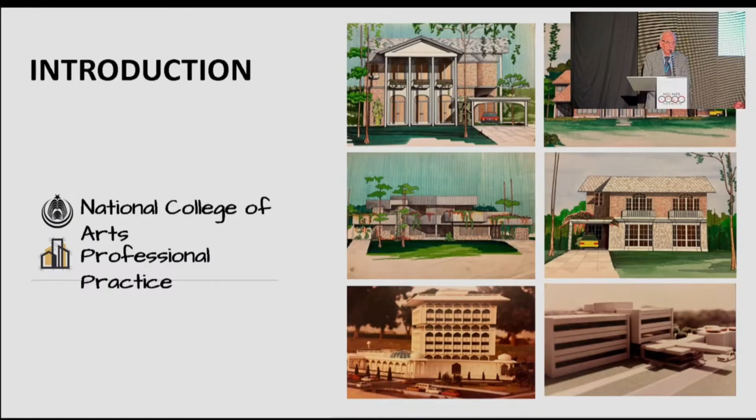One month after this occasion, Huzur became the 5th Caliph of the Jamaat. I had association with Huzur since that time, and I did many projects under his instruction. Next, please.

Then I had the opportunity to work with IAAAE, Institute of Architects and Engineers, Ahmadi Architects and Engineers in Pakistan. The Ahmadi Architects and Engineers Association was established in Khalifa Salis's time in 1971. Under the mentorship of Khalifa Salis, I also had the opportunity to work on different projects.

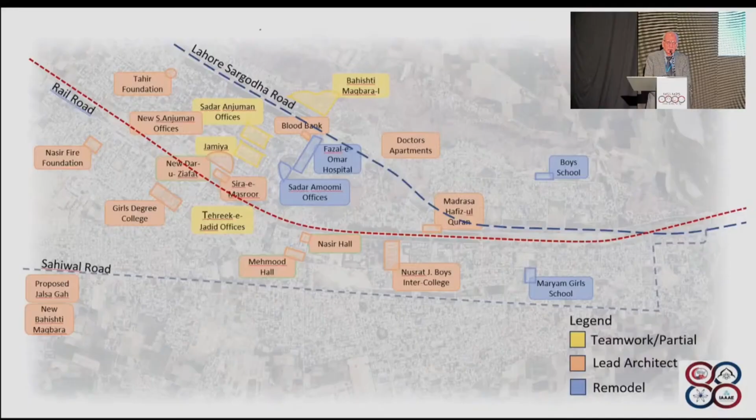Now, as you look at this slide, the projects marked in red, I was the lead architect for these projects. The buildings marked in blue were there, but I was asked to do remodeling of these projects. And the projects marked in yellow are the projects which I did in teamwork with other architects and engineers. Next.

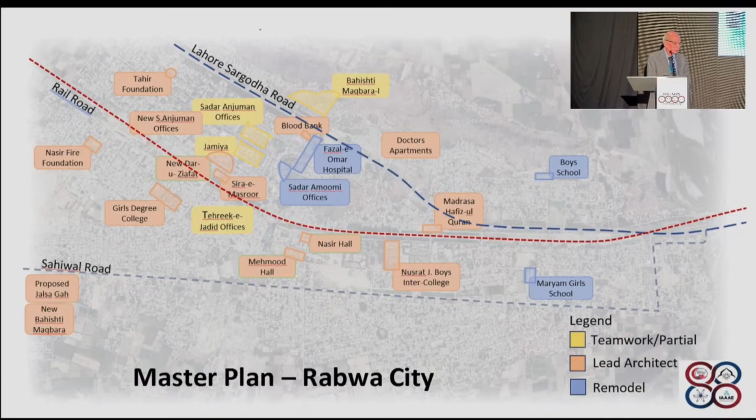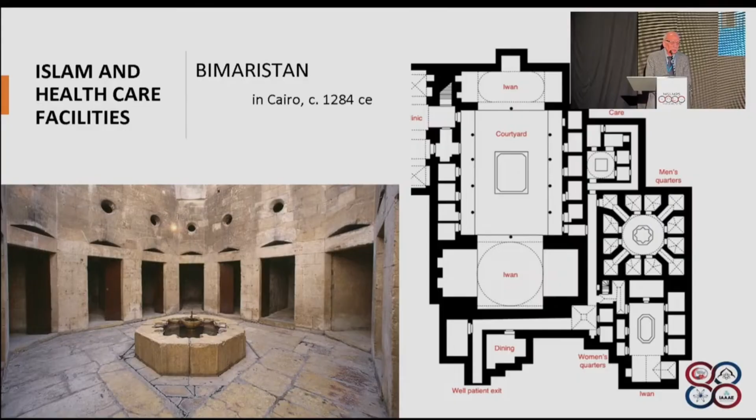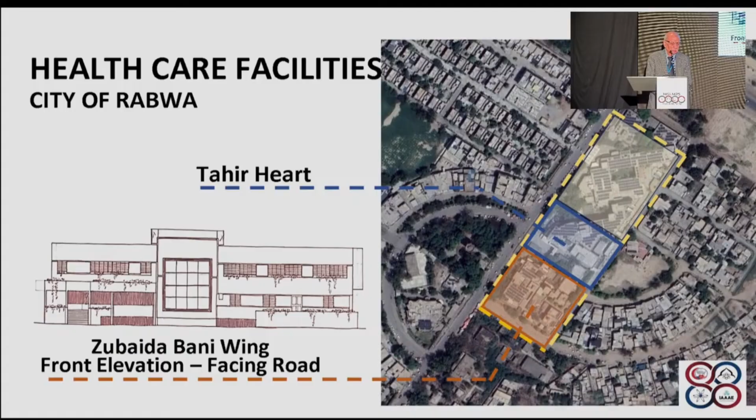Now, here you can see the dashed line marks the site of Fazal-e-Omar Hospital. Originally, the Fazal-e-Omar Hospital was a much smaller concern, which is marked in yellow. The rest of the site was vacant. Next, please. Later on, 2 projects were added here. One which I designed is the Zubaida Bani Wing for gynecology, marked in red. The other, marked in blue, is Tahir Heart Institute. Next.

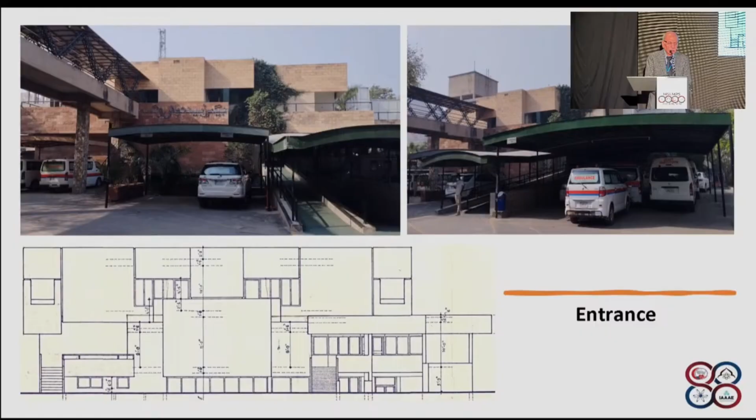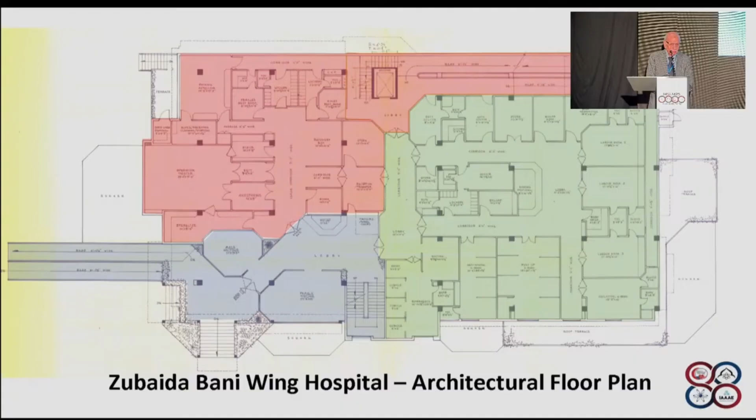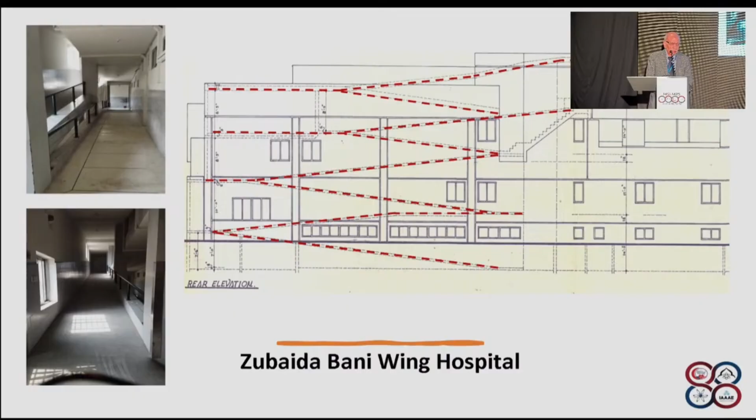In this slide, you can see I designed the buildings in Rabwah playing with material and shapes to achieve aesthetics. But in a hospital, we can't do it because the focus in a hospital is on functions and zoning. Next.